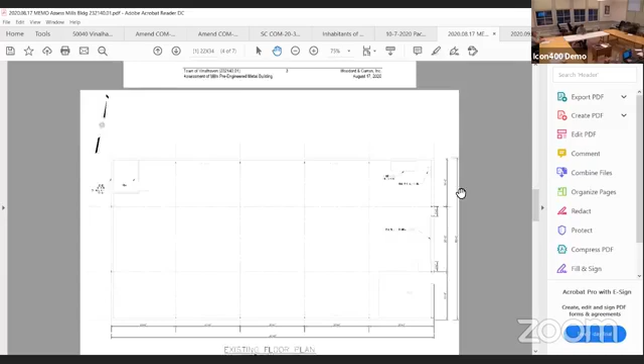Okay, so I guess we need to decide on the conceptual floor plan, either plan 1 or plan 2. One of them calls for 2 doors on each side of the building and leaving the existing bay door, the current front of the building, leaving that one there, which was already there. You can't cut anything up. So we need to make a decision: do we want to have 4 doors or just the 2 new ones?

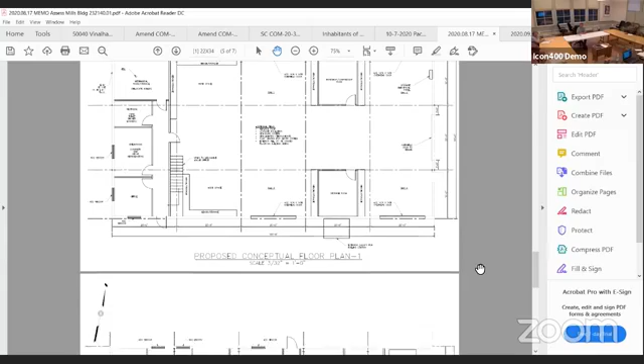We like Plan 2. You like Plan 2, okay, which is only having on one wall with 2 new doors, or 3 doors. 3 instead of 4 doors, sorry. 3 doors instead of 4 doors. Right, okay, and that makes it so if a vehicle breaks down, they can still maneuver and it won't.

What's the difference in the cost? It was, I can't remember. It wasn't... Andy, can you enlarge that?

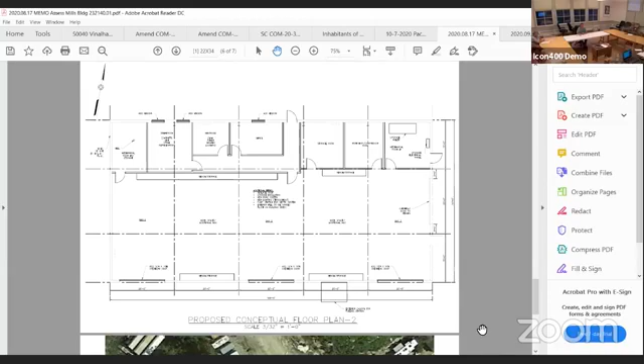We're trying to work through this, so you and Brent and Megan, as the engineers, have a better idea of what the board's looking to see in the building as we finalize a contract for someone to renovate it. It sounded like at our last board meeting there might have been some need for more clarity on particulars of how it would be finished and what would be in there. Hopefully we can work through that today, and you can share what plan 2, as it's on the screen now, is being proposed, and some highlights of that and why it's preferred over plan 1, so the board can get answers and we can get closer to securing a contract.

This is Brent, if I can answer - I think Eric asked a question about cost, or maybe it was Jay, I can't remember who asked it, but I think either of the options will be about the same cost. It's a question of where you're going to spend the money.

I think option 1, when we looked at it - and Megan can describe more in detail the layout of the building - has more structural work, because in order to put the doors in we've got to fool around with the structures and the bracing. We thought that's nice because you can have a door on either end and pull through and pull out, which is convenient as opposed to having to back things out. However, we thought it spent more money on the structural part, and we'd rather spend more money on the actual building and components inside. We also thought that by trying to stay within buying an acre, the less we do outside on the north side of the building, and the less land we need, it might work out a little better.

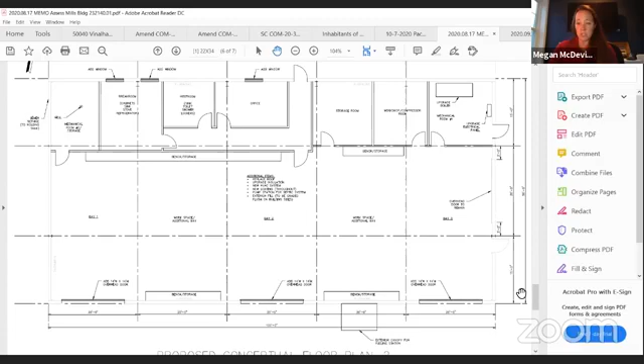One thing from our last site visit - Brent and I talked about it, and we think we might want to take the door on the south wall that says Bay 3 and move it to the end wall, right next to the existing door. If you did that, you'd actually get 4 full bays back, like you originally wanted in your very first design. Bay 1 and Bay 2 would both enter from the south, and Bay 3 and Bay 4 would enter from the east. Then you'd be able to put 4 vehicles in there at once without having to drive around or pull vehicles out to get them out.

So where Andy's got his hand right there - yes, we would move that door on the south side, just flip it over to the east wall. So 2 vehicles would pull straight in, and 2 would come around the south of the building and pull into what we've called Bay 1 and Bay 2. That's very clever. I like that.

So, you want to go with that? I move we go. They said we don't have to do any structural changes to the building, that's fine with me. I move we go with that plan right there, 2 bays on the south side and 2 bays on the east side. Second, by Phil Crossman. Any discussion? All those in favor?

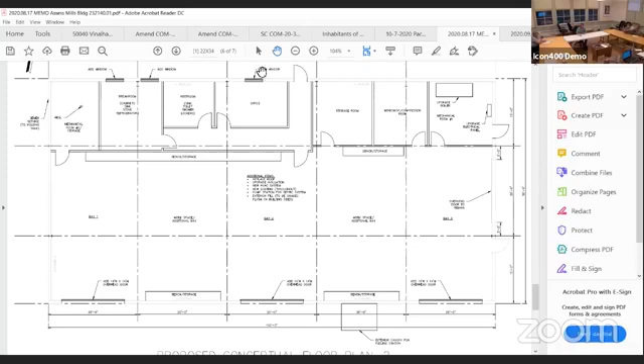Okay, so then these showers. I understand the need for an eye wash station, and maybe that's what that means there, but it looks like shower stalls and actual taking a shower there, which seems overkill to me.

Our employees live close enough that if they're on break time, they can go home. Well, if they suffer a spill of significance and cover themselves with diesel fuel or something else, this would be preferable to getting in their vehicles and driving home.

Well, how much money is it gonna add or subtract from the cost? Is that shower gonna be that much less money? I would think it'd be minimal. So if we took it out, it'd only be... can the shower be the eye wash station also, or do you have to have both? I mean, they're 2 very different types.

I don't know if Megan and Brent, if we'd be required to have one of those overhead full shower things, in the case of a spill or something that needs to be washed down quickly, just like the eye wash station serves a purpose if someone gets something in their eye.

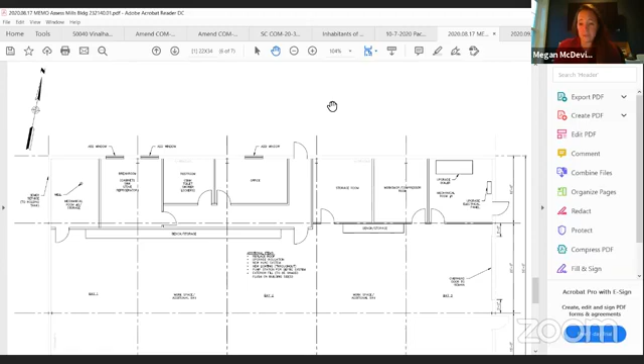It's significantly more cost effective to try to add it now while you're putting in all the plumbing for the bathroom than to add one at a later date. Right, you're right. I agree with that, totally.

Does anyone else have any thoughts from looking at the plans? The other thing on the well, we will have to put a treatment system on that well for use inside. They don't drink the water, they don't use it that much, it's high iron content. So we've put in the plans to put a filter system on so the water won't be quite as harsh.

I think the shower and stuff like that, you just don't want it all stained all over the place. And we can provide one of those coolers for drinking water. The water test has shown it has high iron content.

The existing well has high iron right now. They don't drink it, they don't use it that much. But we're gonna have more people in there using water, washing hands, stuff like that, so we're really gonna put a system on it. Those aren't that expensive.

The existing well is what's going to be used in the building, right? There's a wellhead inside that building. Oh, it's inside the building? Mhm. You know what iron does to fixtures and everything.

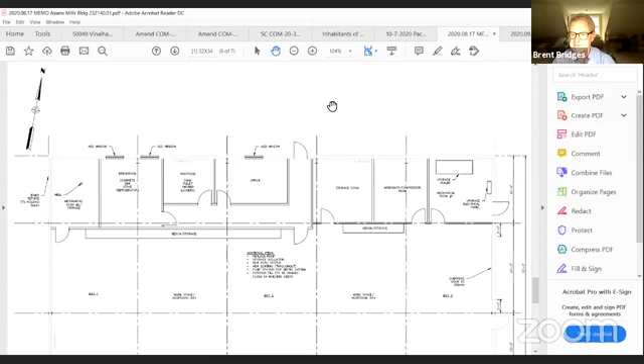I think the action we had was to first approach Sheridan. They've been very patient with us and working forward, and they were the apparent low bidder, and they're willing to work with the budget. So I think if we're good to go, we can start working with them on getting a schedule together and going over types of equipment and stuff like that.

As far as the actual boiler, we can come back to you with a list of things they're going to provide, a little better detailed breakdown than we had provided you before. So you feel comfortable saying go forward?

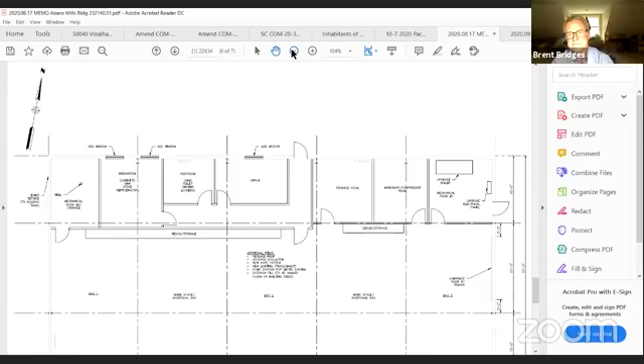So you're sort of, when you say what we had before, it's just kind of a breakdown here. Right.

Sounds good to me. Okay, does anyone else have anything else? Thank you, Brent, thank you, Megan.

Do you want to take up the matter of identifying and selecting a company to work with to do this work, or? I thought you already said that at the last meeting. We agreed to work with Sheridan?

Oh, I thought we did at the last meeting. I mean, did you do it for the bridge? No, that was for Jake. Right, right. I'm pretty certain we agreed to it, if we didn't, bring it up, if we did, then.

I think we did, I thought we already said we would go back to them because they could presumably do it this winter. I thought that was the discussion, but I could be wrong. Should we double check that so you don't have to worry about it? I can double check and we meet again next week and finalize it Tuesday.